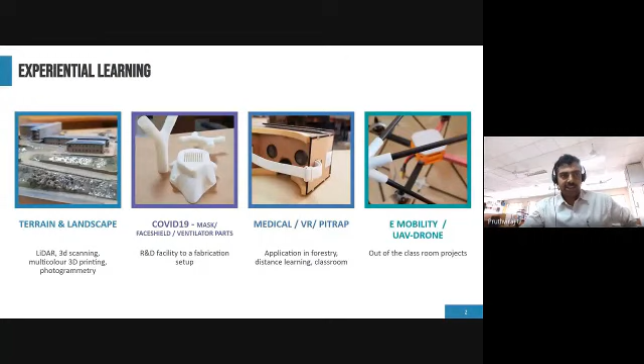So what we will do is focus on prime areas, wherein we will see how terrain modeling can be done, and how that can be used into printing. I will not go into the details of the printing technologies; instead I'll showcase the end product, whichever discipline the student is from, whether medical, civil engineering, mechanical, or mechatronics, and how he will experience digital manufacturing in his stream, since you will have a sufficient session regarding additive manufacturing and different techniques.

So we will showcase over here the terrain modeling, and then move on to how the 3D printing facility at the Center for System Design Analytics, Surathkal, was converted from an R&D facility into a fabrication setup, continuously producing face shields and face masks. Then how it was used for medical, virtual reality, and PiTrap as another session, and then on to e-mobility, maybe drones, e-cycles, and other things. We'll go one by one to see how a student experiences learning and does transdisciplinary projects, and then move forward.

Let us take a typical example of an end user, say a civil engineering student or an MTech student in remote sensing and GIS, or maybe a student into planning and development, construction technologies, and other things. If you see the screen I'm showcasing, you can see the webcam that I am streaming. Can you see this image over here?

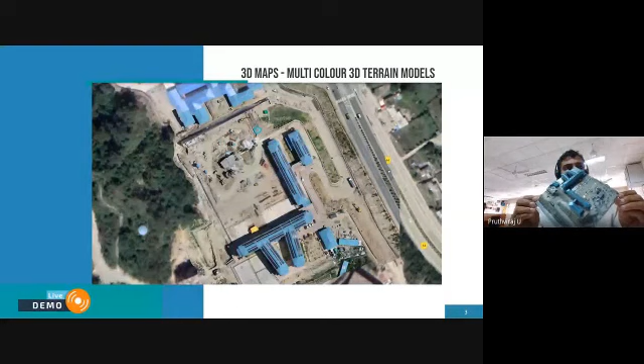It's powder coated. We'll showcase what the machine is, how it has been used, and how it has been used for experiential learning for the group of remote sensing, civil engineering, construction management, and also the CPWD engineers of that particular location.

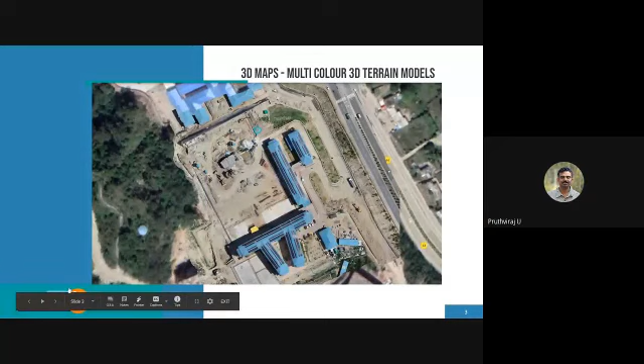So I'll switch off my camera so that we can go and see. Let us go on to the first screen, what this data is basically. I'll just share this particular screen over here.

If you see, you can see a Google Earth image right somewhere over here. And if I try to zoom, I will get a very detailed image. This is basically joining multiple images, around 270, 276 images that are joined together to get a high resolution image, which is then converted into 3D.

So suppose if I try to give an elevation map, automatically the elevation gets loaded. What we have done is taken multiple images and joined them together, and there are multiple softwares which can help with drawing, and all those images are used to get elevation.

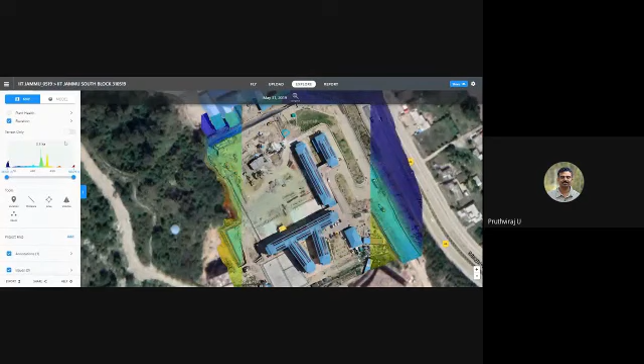You can see over here what is the tallest structure, where the road that goes to Srinagar from Jammu is, what the elevations are, where the hillocks are, all those things. Now that has been given onto...

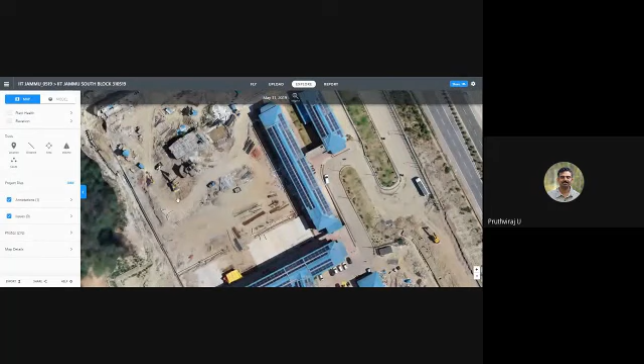...the 3D printing facility that is there, and from there we have got a 3D structure. So first, if you see over here very clearly, you can see an excavator that is trying to excavate, and then if you see the 3D printed model also, I'll just showcase that.

If you see the 3D printed model, that same depth over here is visible, and the JCB can be visible, the volume as well. So that is the precision in which the printers work, and we don't paint it - the printer prints the final CMYK onto it and gives us the end result.

So what we did, the end product was for a group doing construction management, GIS and other things, but we have used additive manufacturing or the 3D printing facilities in our project center, hosted at the Center for System Design.

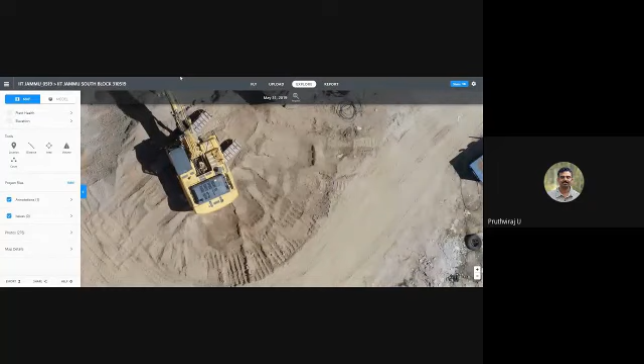So my staff will brief you through the setup of how that thing is there. So we'll move on to this screen. If you go to the next slide, this is exactly the 3D printing setup that we have. Now let me showcase it.

So this is the colored models. If you see over here, different colors have been printed onto this cube, and maybe you can see a spring kind of thing that has happened. So we have used the HP Jet Fusion 580 printer.

You can see over here the different hole patterns that have been made in an inclined pattern, and the precision that is there - the holes are clearly visible. You can also see the springs kind of thing that can be done, and also over here the fine precision threads that are there.

So this is a powder-based 3D printing facility that I'm trying to showcase with a multi-jet color printer.

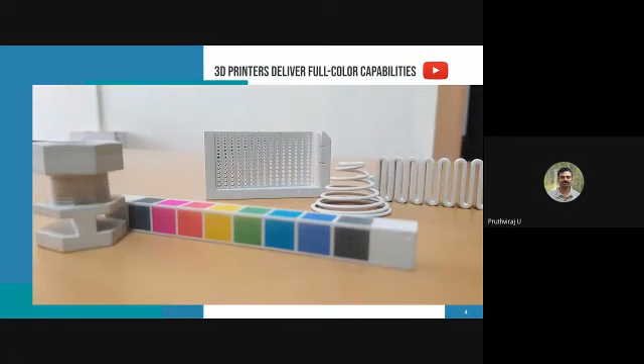Of course, you can always see what a model is and go to this YouTube channel to see its capabilities on how that printing happens. So what we will do is showcase how it is being used and where it can be used.

One of my staff, Mr. Ranjan, will activate the screen. Over to you, Ranjan. Hello, thank you sir. Hello everyone, can you see my screen on my webcam? Yes Ranjan, yes sir, yeah.

So this is our HP 3D multi-jet fusion printer.

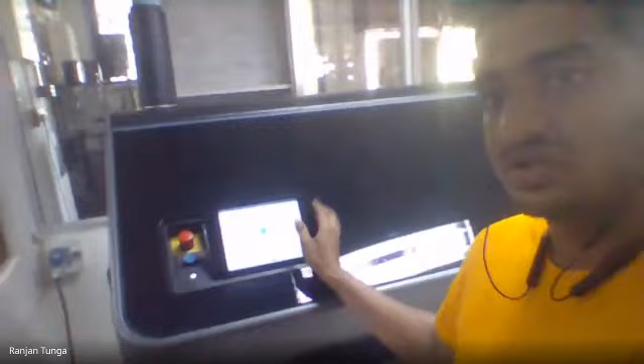It's a 580 color 3D printer, mainly used for prototyping and others. This is our main dashboard where we can operate several jobs, and also do the machine maintenance here.

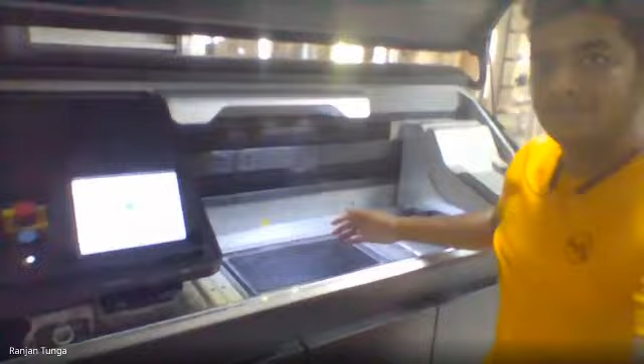If I open this bed, this is the main bed where the 3D printing is done. As you can see, it's a 330 by 150 bed, with a height of 330 also.

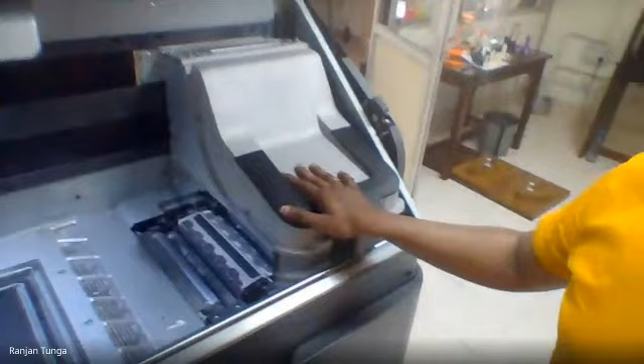So you can pack different parts here, and here is where you enter the powders for the 3D print. It's called the 3D head, and if you lift the display, this is the heat lamp — the thermal lamp that goes over the printer, combining different powder material agents like fusing and detailing agents, which makes the 3D part.

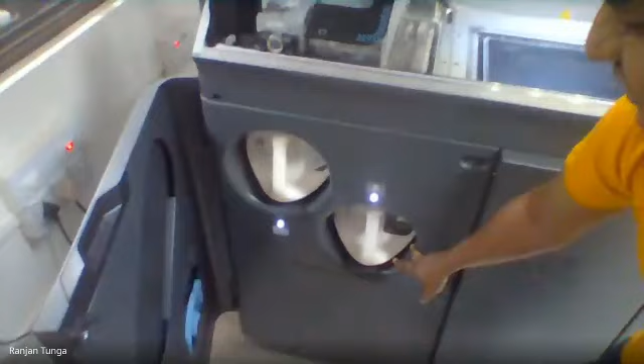If I open below to my left, you can see two canisters. One is the pure fresh material used for the 3D printer, and the other is recycled material. After your job is done, the remaining material is recycled and can be reused, so you don't have to use fresh material each time.

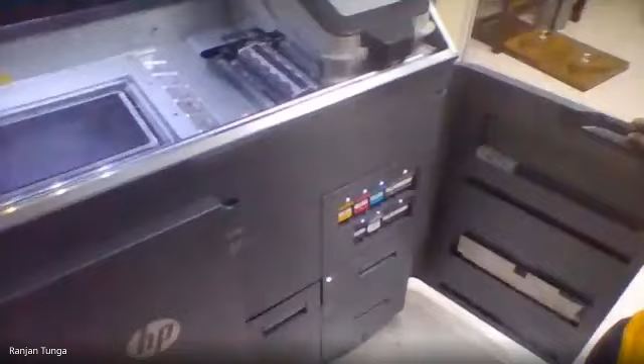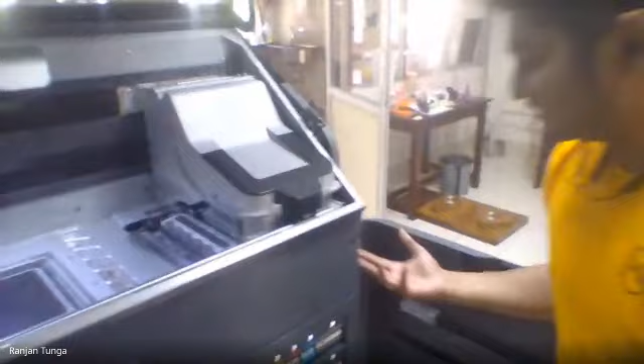If you go to the right, you can see the cartridges — YMC, our different 3D coloring agents, plus the detailing agent and the black agent, and also the bright fusing agent, which on activation by the heat lamp makes the 3D part harder. This is the main setup of our HP 3D printer, and I think I've covered all the parts available.

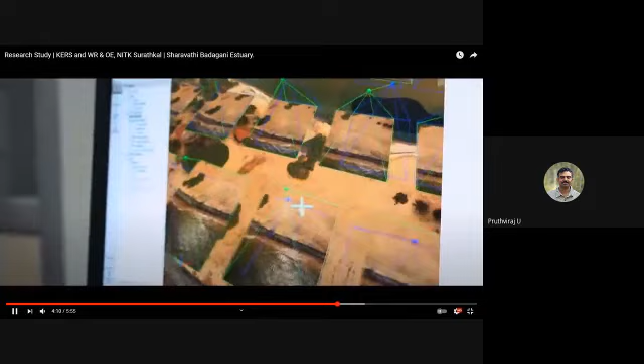So you can see over here the photogrammetry portion. How do we stitch multiple images? We use proprietary software, and also open source software, to do photogrammetry and stitch all those images to get the best information and the digital elevation model. That was how we were able to do such things and get the final result.

So I'll just stop this and share the screen. Yeah, so what did we do?

Basically, we used the input from the drones, put it into our 3D printers, which can get high precision data with the same multicolor and identify it. Now the question comes, what would have happened if it was only monocolor or something like that?

If you see over here, I have a 3D printed model. This is basically an IITK boys hostel, where the 3D printer was FDM and it was monocolor. If you see this, it has printed only a single color onto it, and there's no difference in window color, solar panels, and other things.

Whereas if you take this 3D printer output, it is very clearly visible how the solar panels are there, what is the color, what is the vehicle color, what shade is given. So it is printing the true color as possible, including on the lawn, if they have written 'IIT Jammu,' that is also visible.

Here you can see the optics and the lens. The camera will be rotating, and from the inside there will be pulses up to 1 million per second, and the settings can be changed manually.

I'll show a small scan of how the device will be working, then later on the laptop I'll show scan data of the entire building that I have done previously, so that it can be seen. Normally some time will be taken to register that.

What we have to do is manually calibrate the water level of the device. We can do this because it has an inclinometer, so we can adjust this. Once we are done with that, we can change the parameters. There are different parameters for indoor, outdoor, and long range up to 300 meters. All the parameters can be chosen, and the density of the scan can be chosen. Once we've done that, we can start the scan.

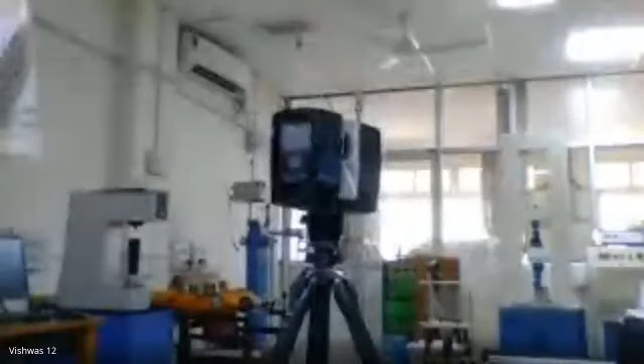You'll be able to see the device itself start moving, and the lens will start rotating and start scanning. For the time being I've kept the shortest scanning duration, so it will take around 3 minutes.

For the first round, it will take all the points in monochromatic. Once it takes all the points, it starts taking images in 360 degrees, and it starts merging the images so that each point will get color, so we'll get a color point.

Right now it is taking pictures in 360 degrees. It will take several images and combine them into a single panorama 360.

Basically this setup is trying to capture three-dimensional data sets. There will be LiDAR and also it is clubbing the photogrammetry also, so that gives us every point that is captured, onto which it adds a color. To get the color, you should have an RGB camera, which will add a texture onto the thing.

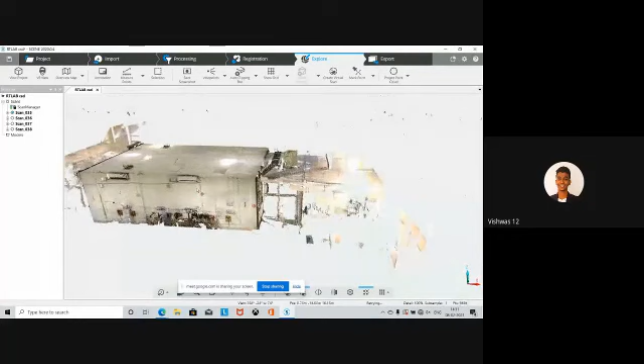This is the captured data. I have done some 3 to 4 scans inside this room before, and I have merged this. So what you are seeing is the scan which is taken from the inside, but it looks like it's from the outside. So when we go inside the room...

So this is how it looks. This is a complete picture of what we have scanned from inside the room. You can see this is the position where the LiDAR was initially kept, and this is the second position where the LiDAR did the second scan.

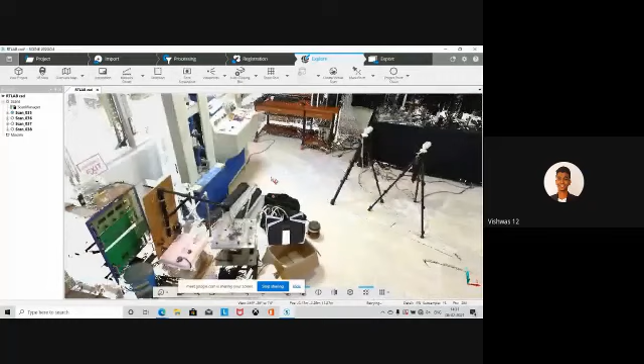Similarly, this is the place where I was sitting, and I'm explaining over here. So I have done around four scans. These are the remote triggering devices and apparatus we have developed for the virtual lab. So this is how the data can be viewed.

There are several applications, including crime scene investigation, terrain mapping, volume estimation, and others. So the complete picture of the room can be made. By doing more and more scans and merging them, we get a better picture and better quality.

So we can mesh this also. We can make a mesh and get the 3D model out of it, which will be a colored point cloud, colored OBJ files. That can be printed even in our Jet Fusion HP printers, or we can also use STL-based printers such as MakerBot or any other.

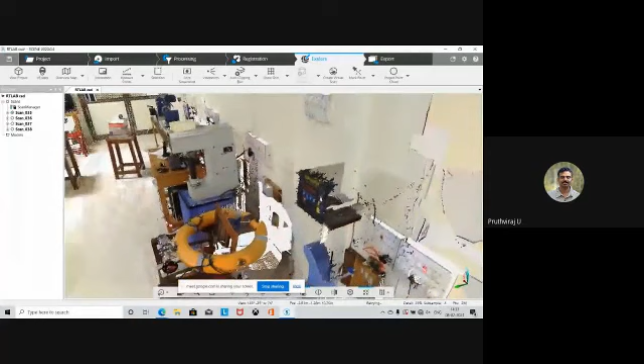Now if you see what is the importance of this kind of thing, it's not only an image that has been created in a panorama. Basically, I'll be able to get the depth information. I'll be able to get what are the textures onto it.

Suppose when I give the colored printout out of it, the table color will be visible, and also the mouse pads used, the camera color — all this information can be regenerated in the printer. Of course, we have to use a third-party software once again to convert all these point clouds into a three-dimensional mesh, which will give a solid surface.

We'll move on to the next. So now this is a data set which can be given. This is very precise data that can go into digital manufacturing and also can be used for re-engineering some of these products.

I'll move on to the next topic, wherein handheld LiDARs — how that can be used, and what is the type of data sets that can be used for capturing the data. Let me just share the screen.

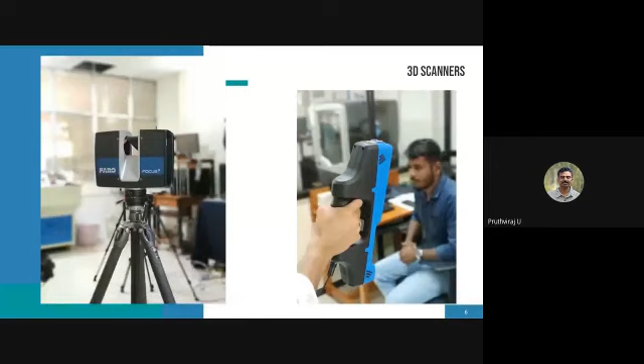Yeah, so now you can see, and I hope the screen is visible to you. Yes sir. Yeah, so this is where we are using handheld data scanners to get three-dimensional data sets, wherein students can do some reverse engineering, or maybe there's an archaeology site that needs to be captured.

So why is this kind of scanning required? Especially, assume that there is a natural disaster and the structure has been damaged — you need to recreate it. So if you want to recreate it, you should have digital data sets. Maybe nowadays you have CAD modeling, architectural modeling, and all those things. How do you get the three-dimensional data sets for it?

You can use drones, you can use terrestrial lidars, and in some places where terrestrial lidars or drone lidars can't be used, you can use these kind of handheld scanners, which will go on to the digital manufacturing. So this is how we are trying to cover completely how to do digital manufacturing, what are the assets that we can get and involve, and then try to solve.

Vishwas, over to you.

Yes, one question was asked — was it used for oil and gas? Perfectly, we are extensively using it in oil and gas fields to recreate the entire plant. One of the refinery plants has been scanned using this device. What we have done is recreated the model and then integrated it with virtual reality.

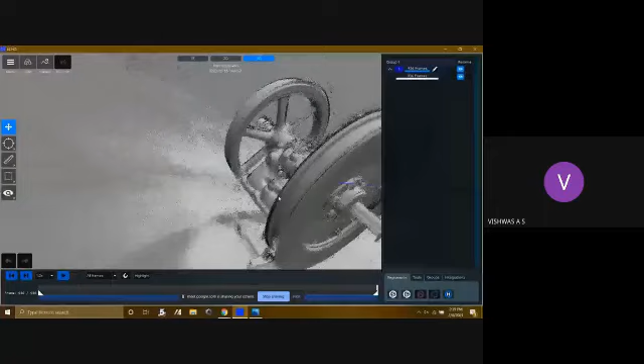So this is a scan model of an IC engine which was there in our IC engine lab. Right now what you can see is a monochromatic colored image, because right now it is not registered. Once the complete registration is done, you can see the colored image and all the 3D model, so that will be showing.

So this is the 3D model of the same IC engine after the registration. Whatever I showed the previous one was the raw data. So by scanning properly, you'll be able to measure all the distance, all the diameters, and mainly you can do reverse engineering. When we have an object, we want to know the precise dimension.

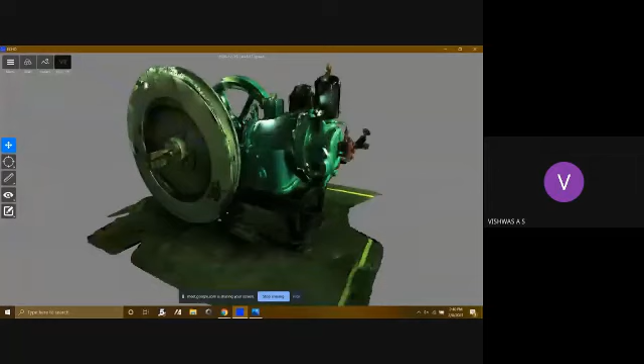So if you preserve the data digitally, we can be anywhere. We don't need to be near the machine to measure the data. So we can take the data with us, go anywhere, and whenever we want to see the data or measure whatever data we required, we can do it using our computer. Instead of manually measuring, this will be very helpful.

So even volume and height measuring, and the accuracy is around millimeters, because the scan can be done multiple times. So that will be helpful.

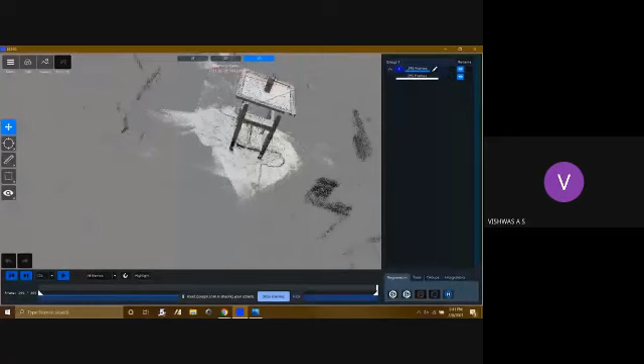So this is one more data. We have scanned a carom board with a bottle. Since we didn't scan the bottom part, some parts are missing. The above parts can be seen clearly.

With proper registration, we will be able to get the proper data. For example, I want to measure the length of this board, so I can click.

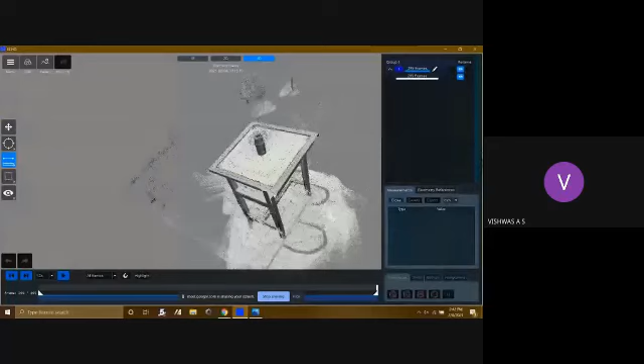The registration is not complete, and that's why it is not allowing us to measure the data.

So this is about a handheld scanner. Yeah, thank you, Vishwas.

You can unshare so that we can start the other thing, how data sets can be done, and then.

Do you use different types of scanners as per the plant? Yes, basically there are multiple scanner sets that we have used, which can be used for refineries depending on what precision we want. Based on that, we will be changing our scanners. I hope it has answered your question.

Now, how a student doing an MTech can do some advanced research so that he will be able to perform better—how he can experience 3D printing and how we can get the things up and running.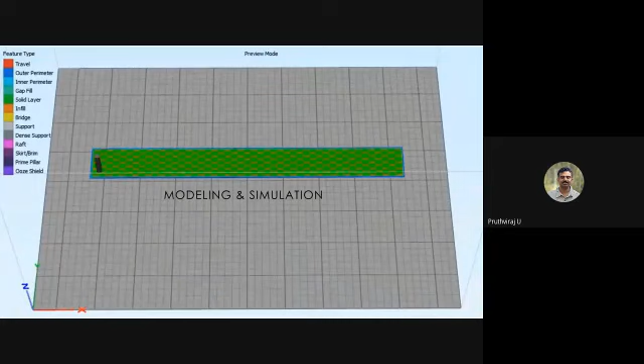Conventional structures are replaced by sandwich structures in order to make the system light in weight. But at the resonance condition, these structures tend to collapse.

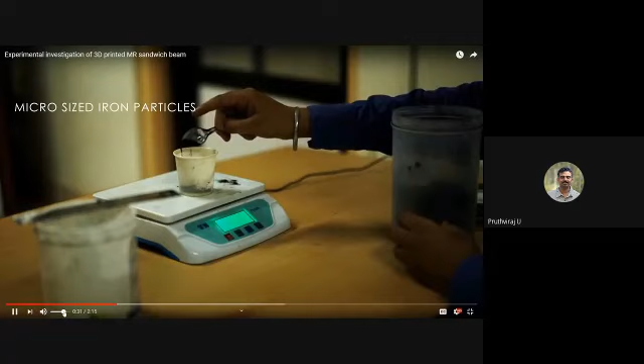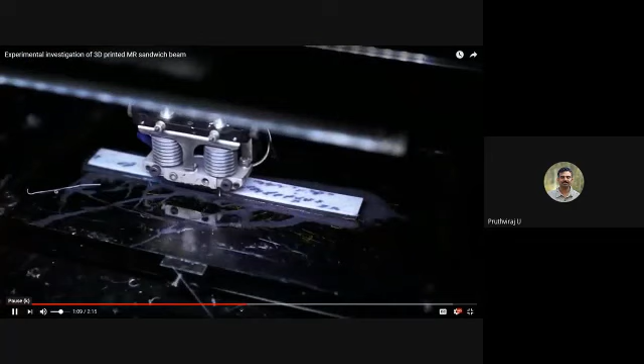So you can see how a student for his MTech work, his name is Rohit Rajpal, had received a patent on this work. Magnetorheological elastomer, that is MRE, is embedded into the sandwich structures such that stiffness of the sandwich structures can be changed under the influence of a magnetic field.

So what we do is, there's a 3D printed part with honeycomb structures onto it. He fills the fluids onto it, so when it gets magnetized, the stiffness parameters get changed. So you can arrest some of the vibrations if required.

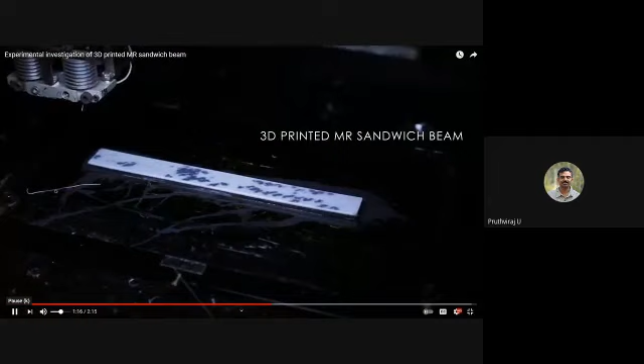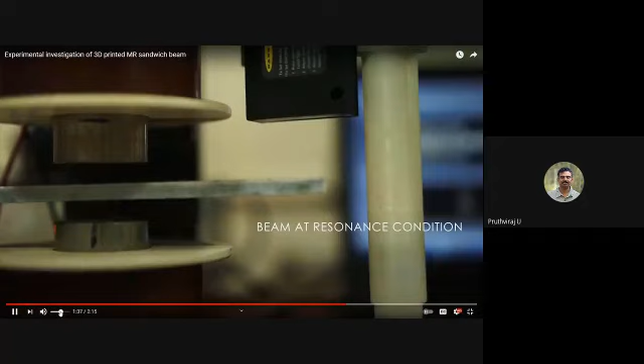So the 3D printing was paused. Again, the 3D printing layer comes. Now you can see the vibrations that are there. When he is powering up the electromagnetic field, you can see it has been arrested because the fluid inside the 3D printed beam activates, and we will be able to change the stiffness of it. This innovative technique helps to avoid the failure occurring at resonance conditions.

So this thing was actually useful in how we can integrate and how students can do experiments and add some new techniques. Mr. Rajpal had received the patent for his work, an Indian patent. He was guided under Professor K.V. Gangadharan, and that setup was done in our lab, the Center for System Design, where an FDM 3D printer was used to print it. So this is how a student really experiences and adds value, and then tries to do some new innovative projects, so that can give him an edge over the others.

So now there's another small 3D printed work, in which one of our staff had done it. It was awarded as a Boeing project, so they had been awarded around...

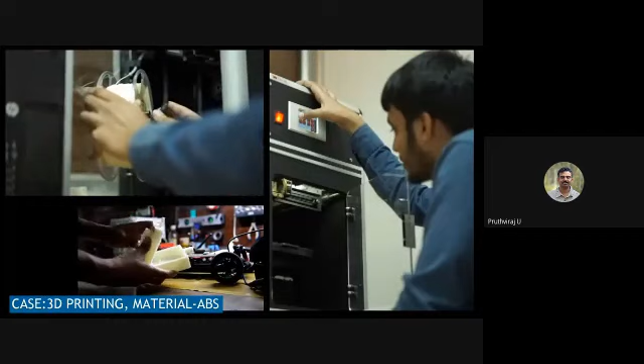And of course, it has to be spray painted so that it gets camouflaged in the forest or wherever it is being kept. Along with me, there was our mentor, Dr. Samad Kotur, who was awarded Asamanya Kannadiga for all his works. And the way in which the positioning has to be done, so that we will be able to capture the camera at the right positions, and then we'll be able to capture whether it's a tiger, leopard, or elephant—whatever it is that we want to capture. Based on that, we'll be able to do it.

So getting back to the topic, you would have seen right from UAVs that went into 3D printing and additive manufacturing, then using simple 3D printing, not high-end, how to create award-winning projects. From there, how to do a project that is really useful.

The cost of the ready-made camera trap was around 45,000, whereas this device is less than 15K, because the Raspberry Pi costs something like 3,500, and the 3D printing spool can be done by a desktop 3D printer, along with spray paint and small PIR sensors. And of course, with Python scripting you can program it the way you want—timers can be added, logo marks of departments can be added, all those things.

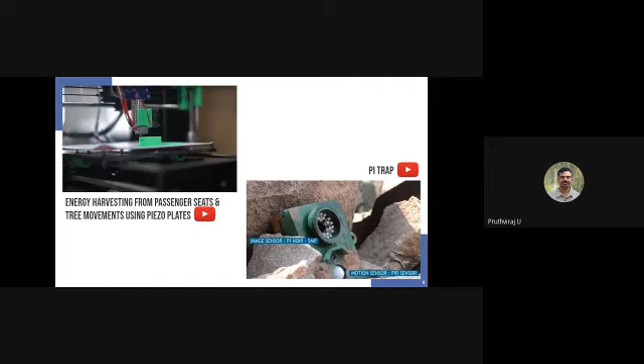So finally, we were able to get very qualitative research on the tiger map in the Kudremukh Wildlife Division—heat maps, the critically endangered species were identified, and it was highly appreciated, and students were able to perform better on it.

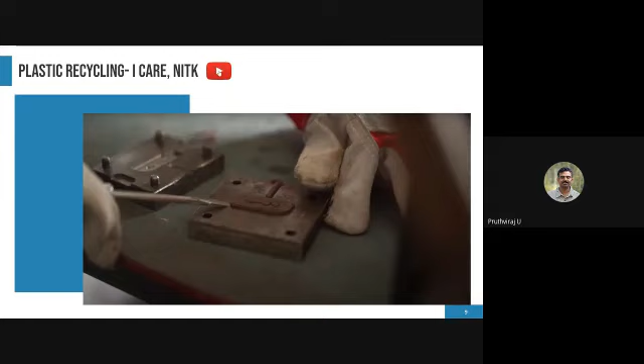So the question comes: is this the only way to do it? Of course, I'll not go into too much detail of manufacturing the 3D filaments—maybe that may be covered in one of the topics—but I'll showcase how the NITK students were able to actually capture the waste and then try to make some spools and keychains from all the waste that is there on the NITK beaches and nearby beaches.

So basically, this was a group from Incident. Incident is a cultural festival, and it has one social responsibility initiative called I Care, Incident Care. You can see a lot of plastics that have been arranged in the shape of an eye, and a bunch of students who volunteered for this event. Let's see what their objective was and how they were able to use those waste plastics to create a spool or a keychain or whatever it is.

Annual cultural festival. It is regarded as South India's second biggest festival. Team I Care is under Team Incident, which undertakes social and environmental activities.

As part of our I Care initiative, students collected environmental plastics around the beaches of NITK. They collected the plastics and then built a small desktop-sized, in-house plastic recycling unit.

These were things taken from the scrapyard and painted. You can see the motor from a junk that was collected and welded to form the shredders, and it was a laser cutting shredding unit.

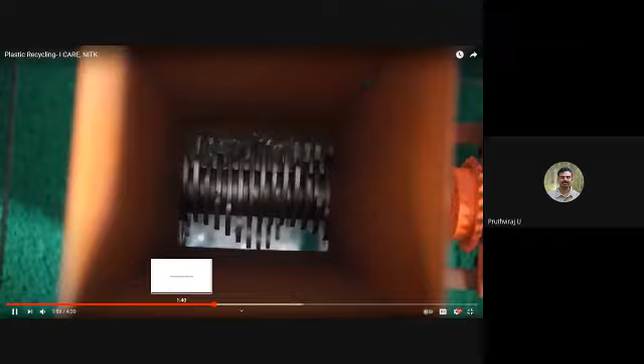Templates were designed so that they can shred the plastics. Lot of improvements are required to improvise and get consistency in the 3D printing facilities, but what we are proud of is how students are using what they learned in theory to create at least half a spool of plastic filaments used for 3D printing, or make an inject mold onto digital manufacturing and give a keychain back to the society.

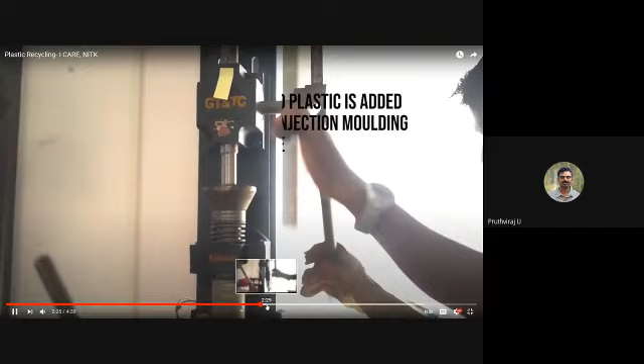GTTC Baikampadi was helpful in fabricating some of the devices. You can see one of the molds made using CNC machines, and something everyone would buy and love - one of the several ideas we got was the keychain.

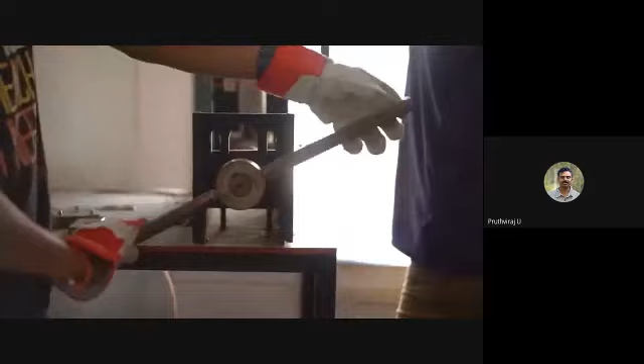So this is the injection mould. Similarly, the extruded filament also comes in that same way. Here I'm showcasing how a keychain is being made - a cylindrical heater is aligned to the mold, and then the plastic is injected.

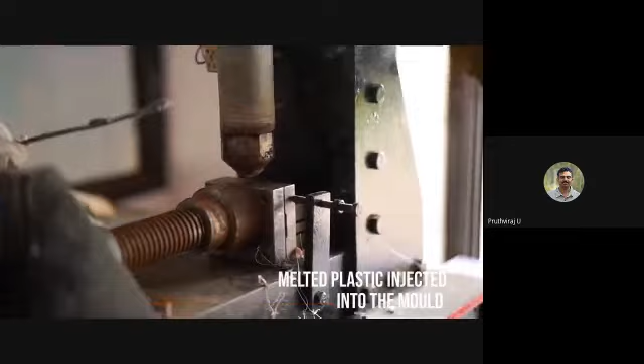You can see the mold and the negative die, how they are able to get that heated thing. Similarly, as I said, the filaments were also being done this way, and this was where they were able to generate them.

Many useful products like keychains, pen holders, and spools that can be used for 3D printing have been made. Of course revisions and corrections are needed, because sometimes the filaments break due to being brittle. What they have learned and what they are doing needs to be appreciated, and that's how it has been moving forward.

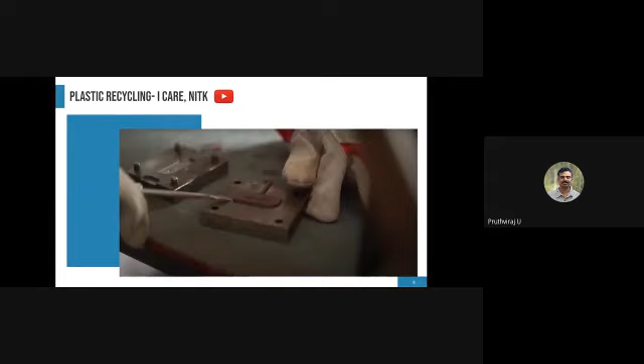Professor Gangadharan was also part of the national team. It was not used extensively because that stage never came, but various mask parts were being 3D printed, and around 32 lakhs worth of setup was given by Stratasys to develop this in Bangalore, so we would be able to run these machines 24/7.

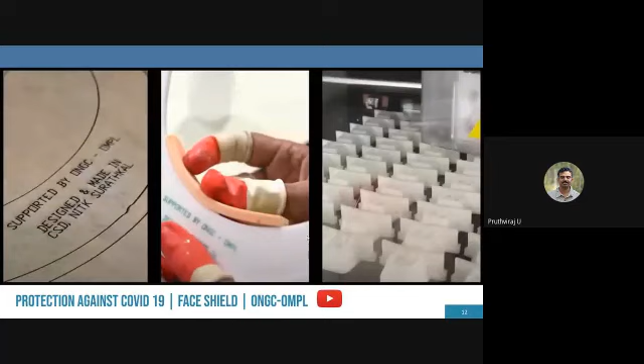Here, basically OMPL and ONGC were very helpful. You can see it's not only the 3D printing thing, but also laser cutting, along with a mixture of all these methods joined together to get one result. This is a small clip showcasing how that product was done, and how we were able to achieve it. This is an excellent initiative done by OMPL.

NITK. They were kind enough to donate the material cost. Professor Gangadhar came here and explained the CSD initiative to combat the spread of COVID-19, an innovative shield manufactured, and showed how it can be utilized to avoid transmission of the virus. We saw the practical demonstration and it really helped. The idea has been carried forward.

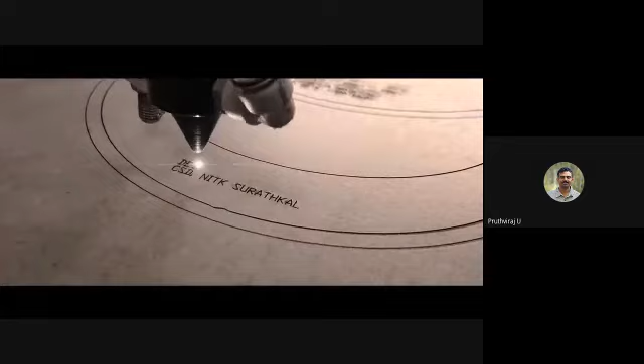We discussed with ONGC, and ONGC was kind enough to accept our idea and came forward to help NITK and OMPL. This is our laser cutting machine joined with 3D printing, and together we have been successful in preparing this face shield on a mass scale and distributing it to COVID warriors like ASHA workers, police personnel, doctors, nurses, and even our forest guards at the border of Dakshina Kannada. It's a nice initiative done by NITK. Thank you.

That was the work we had done and performed during the COVID time, and literally we made the machines run day and night. The 3D printing facility and laser cutting machines were kept on for 22 hours per day. The last shift was around 11:30, we would give a print model, and by 5:30 a.m. the job would complete. Hardly 2.5 hours was the rush time, and we were able to outreach things.

So that was about 3D printing and other things. Now, how can we get into something where it's not only 3D printing—suppose if I want to burn or etch, how can I use it? This is a typical example of our laser cutting machine, which can be used in combination with 3D printing for a digital manufacturing technique.

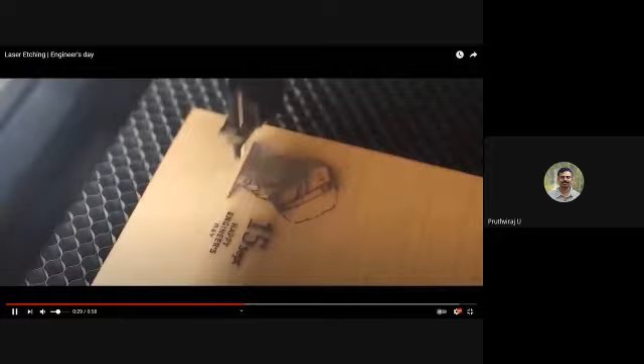For Sir M. Visvesvaraya, we celebrate Engineers Day, and as a compliment we did an etching onto it, a small memento that can be given to any visitors who come to our lab on Engineers Day. We'll showcase the live machine. It was a 40 watt laser cutting machine, CO2 based, which we enhanced to 80 watt after the age of the laser tube was over, and this is how the final product looks.

We'll share the screen of the live feed of that machine, which is 2 axis. Please pin Steven Lloyd's screen. Is it visible? Can I get the feedback? Yes sir, can you pin it? Yes sir, Steven you can activate the thing.

It's an interesting small etching part going on. If you can see it and tell us what that part is, it will be highly appreciated. This was an event organized by Canara College as part of a faculty development program. I hope we are coming to the fag end of this session, hardly 10 minutes left. We've taken you through videos of production devices and machines running in the lab, and we are trying to print it. It's running an etching—not doing the cut, it is doing the etching. The speed is faster so that it does not cut into the MDF.

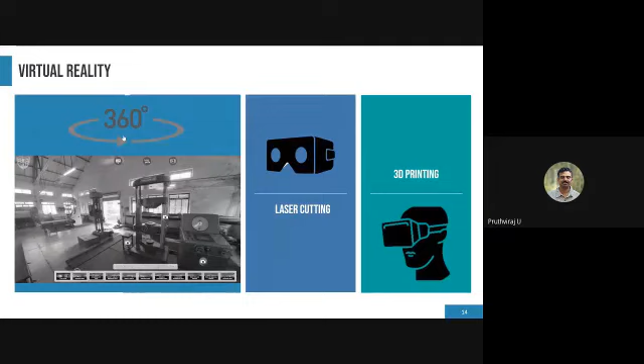Let me showcase this particular screen over here. So if you see over here, we are trying to create a virtual reality thing so that students can access this particular lab, and from there they will be able to know how big the setup is, and from there they'll be able to perform a particular experimental setup to know all those things.

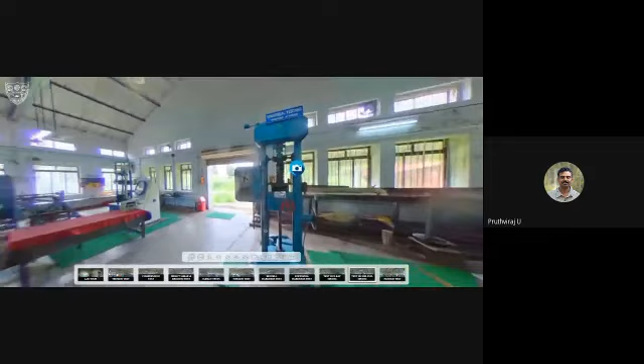So of course, here they can access it on their mobile or on a laptop, all those things. But how can we give them an even better feel, and how can we give that virtual reality feel onto it? For that, what we made was, as I said, not everybody has an Oculus Rift or a virtual reality kit.

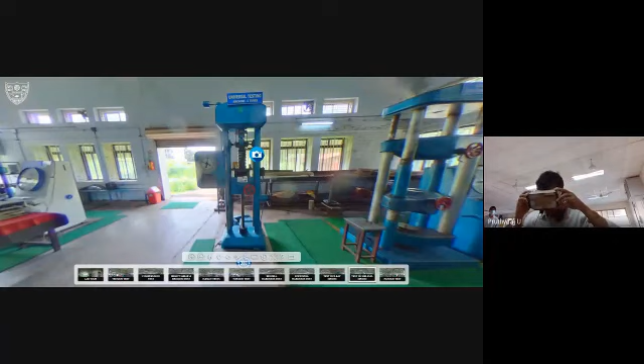You can pin my webcam feed. So you can see over here, we have a laser cut cardboard box wherein you can place your mobile onto this device and actually use this virtual reality setup. So if you see, basically this device comes like this, and then you can rotate all around and see how the lab is. Students will be able to access the lab and get a feel of it.

I hope this product is visible to you. It's a simple cardboard box, a stencil was given, and it's not necessary that they should have a laser cutting facility. They can cut it using cardboard sheets and get this product. Also, since they need a small lens, some of that can be created using waste thick plastic sheets or something like that.

And of course, if not laser cutting, how we can do it is basically with a 3D printing facility. So if you see the setup over here, basically you have a 3D printed part. You can place the mobile camera over here and insert it, and then of course wear it once again for the same feel. Of course, an Oculus Rift would have been a much better feel for this work, but students can also build it on their own since templates were given to them, and that is how the lab was explained to them and they had seen it.

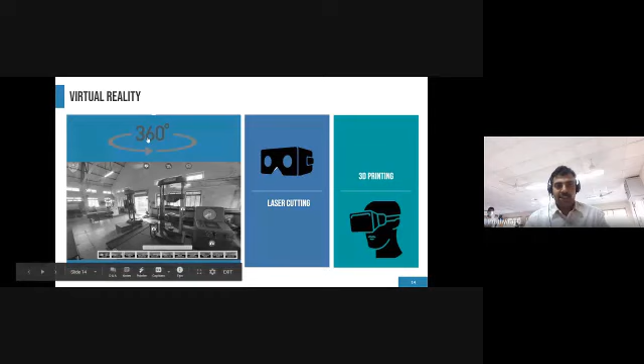So I'll just go back to how the fluid machinery lab was. I'm sharing the screen, so they were able to go into the lab, go in details, see where they were supposed to sit in the lab, and from there maybe go over and access the whole lab in a complete 360 degree view, creating their own virtual reality kit using a smartphone.

Most of them had a smartphone, if not a laptop or a PC. For those, there's this HTML page which they don't have to pay for, and it's accessible to all. Anyone in the world can access this. From there, they can go on to YouTube tutorials or simulations and perform this.

So here, what was the 3D printing thing? Either use a laser cutting device or maybe a 3D printing facility to create a virtual reality.

So now coming to the last slide before we end, we have 5 minutes to go, and how this 3D printing facility can help us go from concept to reality.

This is one of the examples, the concept of e-cycles, which is slowly being manufactured by NITK Center for System Design. 200 e-scooters, e-bikes, and small mini scooters will be fabricated at the Center for System Design and given to students once they are back, funded by the NITK alumni.

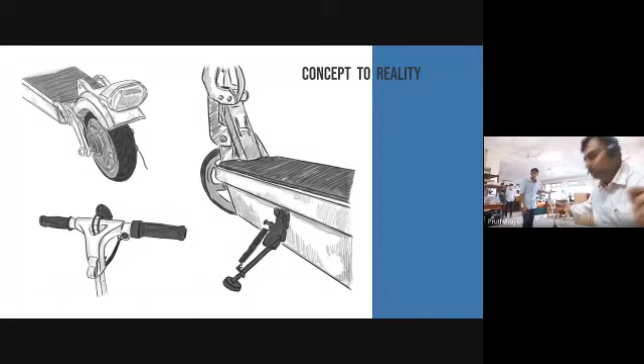You can see the parts. Pin my webcam feed. So you can see this entire portion was 3D printed using the HP 3D printing facility. So it's a pin, you can unpin it and it goes over there, and then it gets locked.

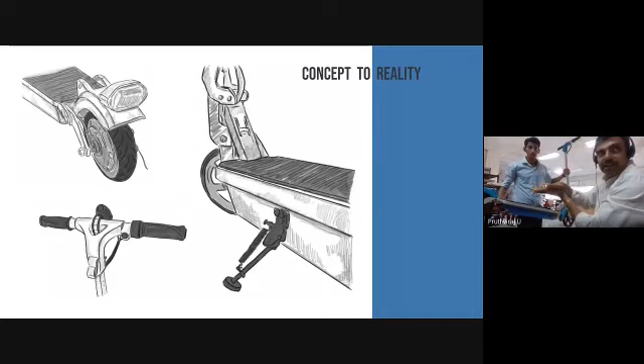That can be used for docking. So this is the inert thing, and of course this will be converted into an SRM motor. We'll do that in a later part. And you can see the handle also.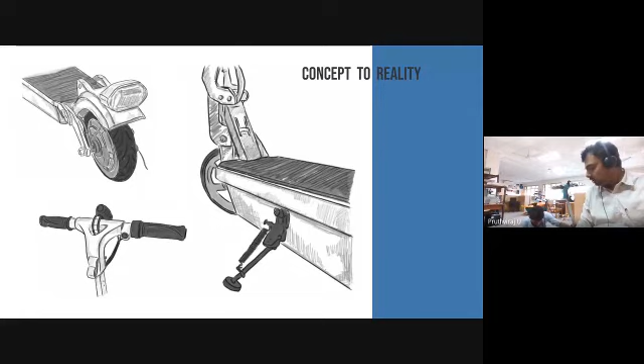The innovative thing here is it's integrated with something called IRIS. If you've done a PhD at NITK, those provisions were there. It's called Student Online Management, and you can scan that, get information, and activate the cycle to move. It has integrated GPS, brake lights, mud guards - all those portions were 3D printed.

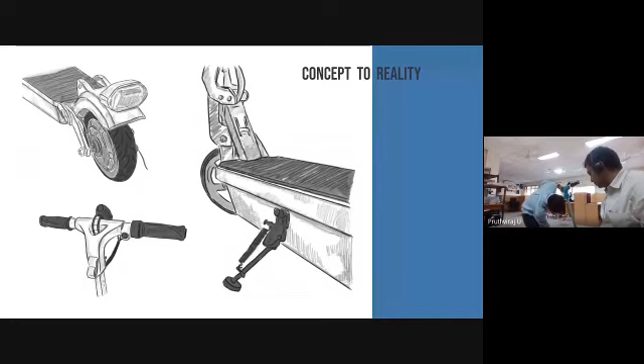Rakshit, can you take a small ride? Yeah, I hope we'll try to showcase. So he is going there.

So that was a completely 3D printed and metal fabrication. You can just come back. Someone can open the door so that he can go out. You can see how the integration of lights and other things have been done. Yeah, he has switched on the light. He is trying to move forward, and done. So now that was a small part.

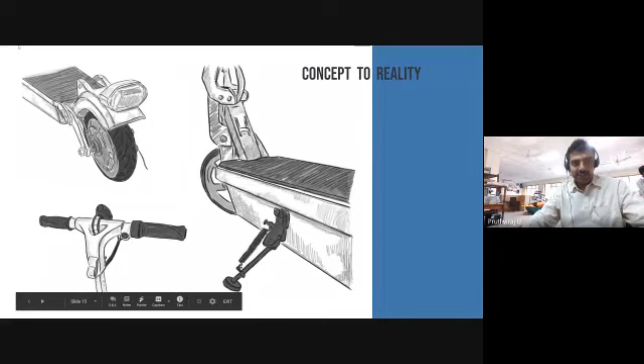So we'll move on to the final slide, in which a multi-rotor kind of thing can be demonstrated.

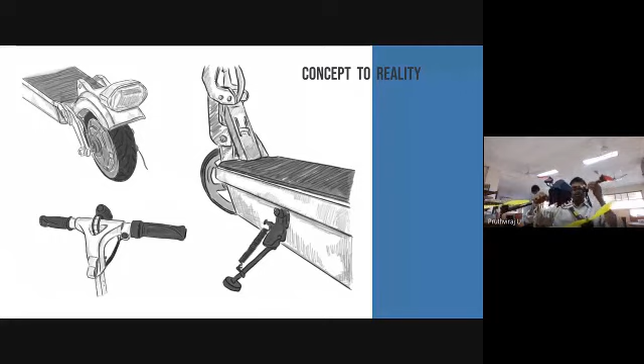Thanks. So you can see over here, this is an integration of 3D printing. You can see the legs, carbon fibers, and other things to generate a 3D printed UAV for your analysis, or maybe photogrammetry and other things.

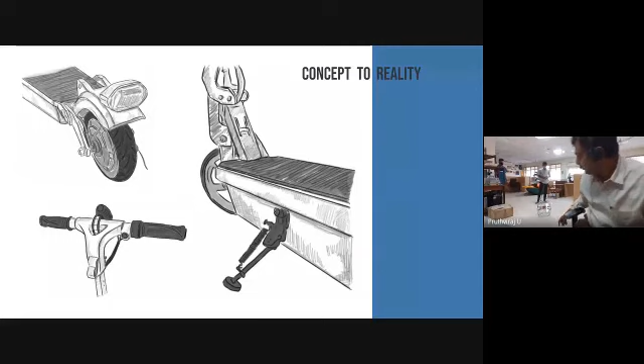So one of our interns, Manish, will do a demo. You can see a small indoor drone. I hope, yeah, indoor drone. You can see a carbon fiber cage that is there, connected by 3D printed portions. You can see there, he will try to take off.

So it has taken off, and it has been protected all around by a cage. Hope it is visible to you. Yeah, he's landing back. Yeah, can you get the drone?

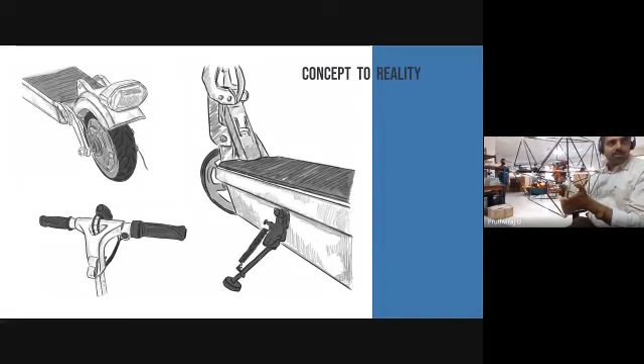Yeah, yeah, so this is the drone, we can see the 3D printed parts that are there, very next to it, and the controller has been covered by another caged part. So you can see different 3D printers that have been used to integrate the carbon fiber rods as well as aluminum tubes to create such kind of indoor drones that can be used for classes and other things.

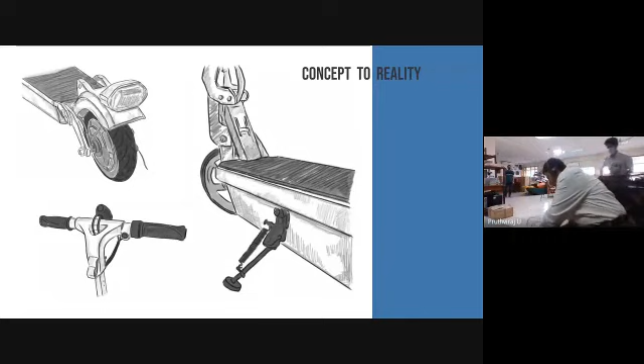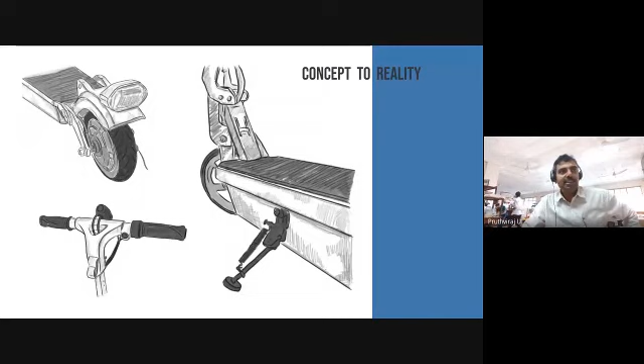Thank you, Manish. So with this, I come to an end. It is 3:30, so my schedule was given up to that. So I come to the end of my talk.

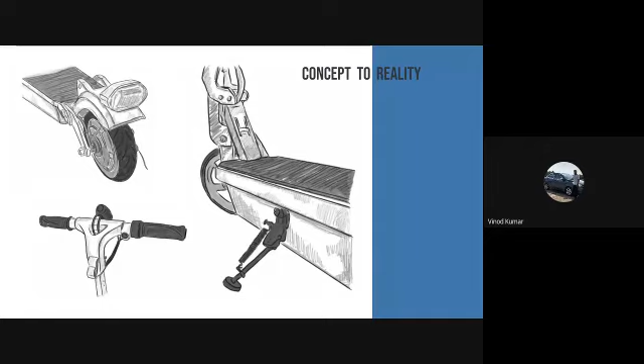Hello, good evening sir. I'm Vinod Kumar. Am I audible? Yes, sir, audible. So thank you so much for the wonderful session. Actually, we didn't feel like it was online, we felt it was like offline, like we were visiting your campus. Thank you, sir, thank you so much for the session.

One question that I have is regarding the 3D printer facility that you have at NITK. If our students get some models, can that be 3D printed there, sir? If it is possible, how?

Yeah, basically, usually for student projects, if they are able to give the material cost, we can work it out, and some nominal charges will be there as per institute norms. Of course, it's not like a regular consultancy. For student projects, there's a different way in which we operate, so that the running cost of that setup can be maintained. And of course, the HP based 3D printer, that is powder selective, there are some high-end 3D printers that may be very expensive, which may not be given for student projects. But other FDM based 3D printers definitely will be spared. Many students of neighboring colleges are coming and utilizing it, especially for their competitions and other things.

Okay, sir. Okay, thank you so much, sir. Yeah.

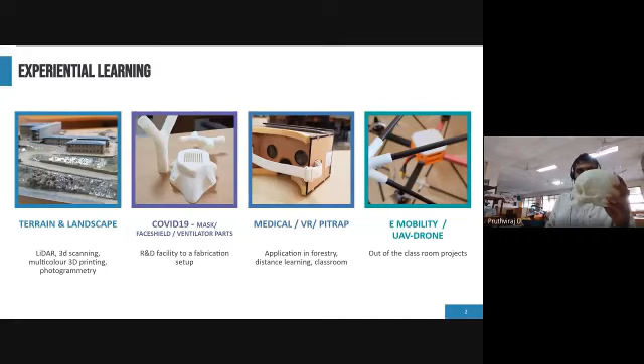So this was some of the small MRI data set that was there to recreate this portion. This is basically used to train the doctors, like how to do the scanning, how they have to place the body. And there's one thing, material selection is very important. Not all materials, because they should not be reflective. When you do an MR scanning, you should know what is bone, what is flesh, and all those things. So for that, if you want the same feel, those 3D printing materials should also replicate the same human body tendency.

Most of the materials now, carbon fiber and other things, many materials are available. Maybe some other lecture topics which are there, more technical, will cover this.

Multiple imaging softwares are available. Sometimes we use the software provided by the printer manufacturers themselves. Maybe HP has their own 3D printing software, Stratasys has their own CAD modeling, meshing, and slicing softwares, MakerBot has its own Make 3D. Third party options are like for photogrammetry, you have Pix4D, Drone Deploy, or if you are using 3D, you can use Magics and get the data set. And for Faro, you have the point cloud data sets.